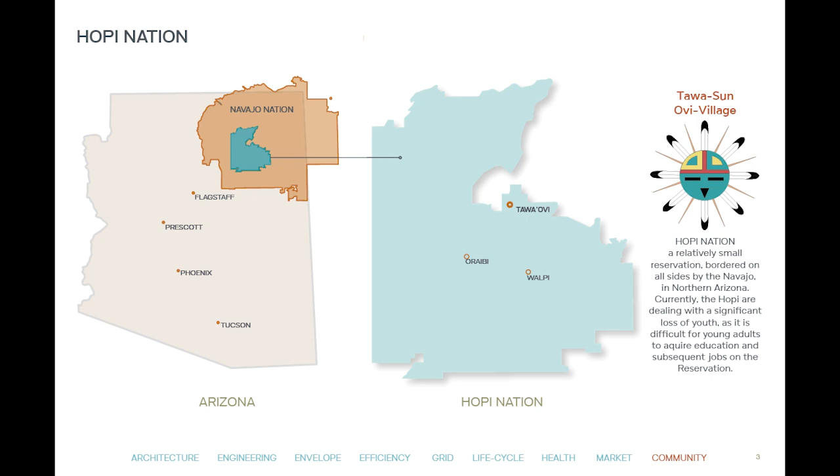Native Peoples Design Coalition at the University of Arizona facilitated a partnership between our team and the Hopi Tribal Council. The council provided a flexible master plan for a new village, Tawaovi, which roughly translates to Sun Village. The hope for the future village is that it will celebrate Hopi culture in a modern way and create opportunities for the Hopi people to flourish.

Hopi Nation uses a clan-based land system where land is passed from generation to generation within each clan. This new village will be built away from land currently owned by other clans, with no political or sacred implications.

The site currently has limited access to necessities such as grocery stores, public transportation, and healthcare options. The main grocery store, Bashas', is 1 hour away by car, while public transportation and healthcare options are at least a 5-hour walk. The nation as a whole is car dependent, making commercial spaces within walking distance a priority.

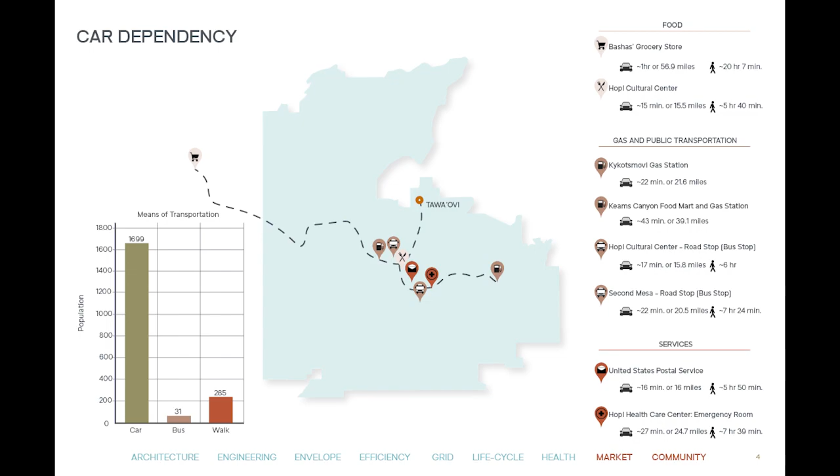When we started this project in January, we traveled to the Hopi Nation to speak with members of the tribe and get an understanding of their culture and their desires for the project. Key cultural practices and values they wished for us to prioritize included an emphasis on food and the communal nature of cooking, agricultural traditions such as dry farming, water conservation, stewardship of the land, and unity.

These cultural values became the backbone of our design responses. Communal spaces, large open kitchens, terrace roofs, increased solar production, radiant flooring, and rainwater collection were all incorporated to promote sustainable and healthy living for generations to come.

The goal of this development is to bring more educational spaces, housing, and employment opportunities to encourage Hopi youth to return to the reservation if they've left, or stay within the community.

Of the registered tribal members, 70% of them have a family, and about 50% of Hopi people have had experience with higher education. Therefore, it's important to provide housing and commercial amenities that accommodate their educational, mental, and emotional needs.

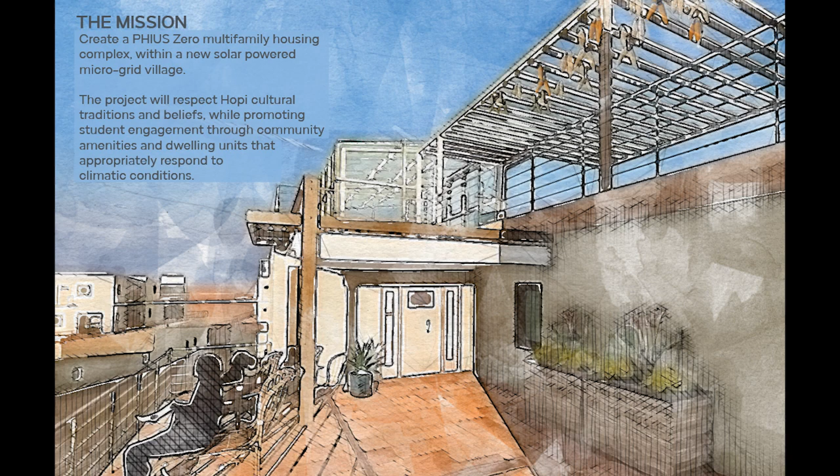Our mission is to create a PHIUS Zero multifamily housing complex within a new solar power microgrid village. The project will respect Hopi cultural traditions and beliefs by promoting student engagement through community amenities and dwelling units that appropriately respond to the climate.

The project goals address a culture of sustainability by using rainwater collection, a graywater system, and the use of prefab CLT. Exterior terrace spaces create room for traditional activities and provide a sense of visual connection to the land.

Using native vegetation for the landscape, as well as replanting those on site, minimizes invasive flora and respects the land itself. Sihi Plaza is communally connected while also providing ample private space, assisting in healthy communal growth.

Due to the minimal access to utilities on site, all three teams from the U of A have coordinated the development of a microgrid to assist in creating energy independence for the Hopi tribe.

Sihi Plaza houses students for an adjacent technical education campus. The plaza provides commercial amenities that are essential in the master plan of the Tawaovi community.

Because we're in ASHRAE Climate Zone 5B, an emphasis is placed on access to sunlight. Therefore, Sihi Plaza's form maximizes southern solar exposure.

To sustain life, there must be sun and water. So a combination of gravel runoff collection skirts at the base of each building, drainage concrete pavers, and native plant bioswales collect, distribute, and use water.

The Tawaovi Development Guidelines have requested trash compactors, native plant spaces, and fire access roads.

We have honored these requests and continue to follow their guidelines in our construction.

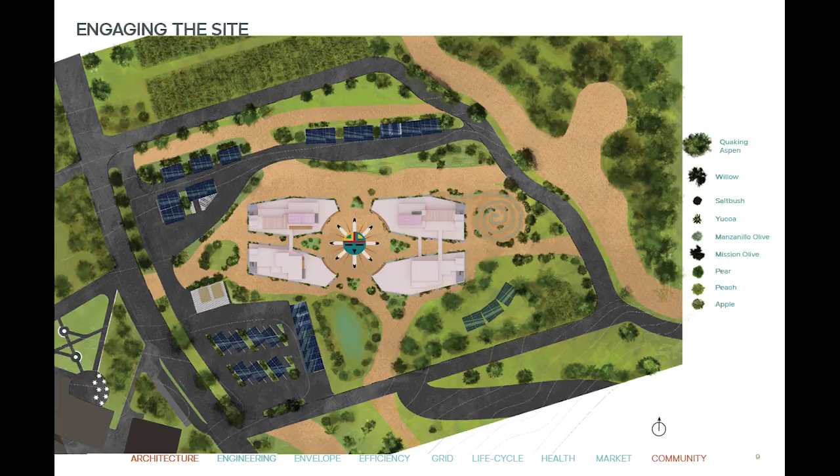Solar power is produced with photovoltaic parking shades, rooftop panels, and ramadas on the north and southeast areas of the site. Hopi architecture traditionally incorporates plazas for cultural celebrations. The central pavers depict Tawa, the sun god, grounding the plaza and making it an ideal space for ceremonies.

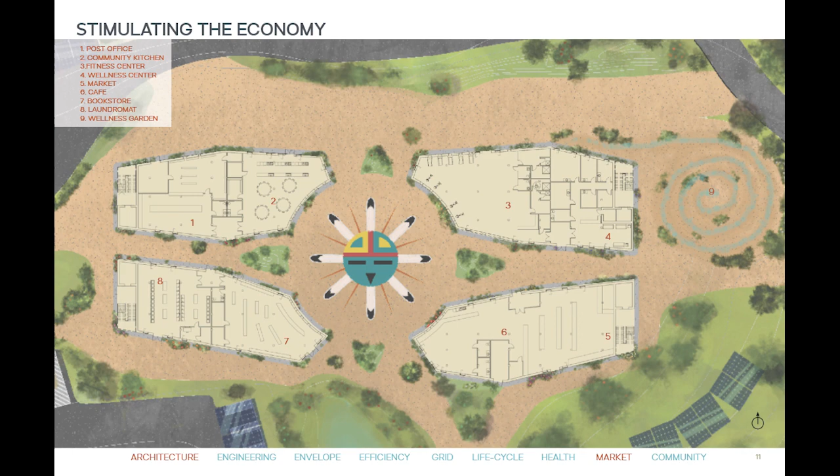To assist the Hopi in stimulating the economy, creating new jobs, and reducing car dependency, the first floor is programmed with a variety of commercial and community services. A post office and laundromat provide needed basic services. The combined market and cafe address the food desert condition on site, while also providing a space for students and the surrounding community to enjoy meals together. These first floor commercial spaces are accessible not only to residents of Sihi Plaza, but to all Hopi.

The community kitchen provides a space for cooking classes, celebrations, and social events. Some elders expressed concern for maintaining health in the community, so a fitness center was incorporated for all Hopi on the reservation to maintain their physical well-being. Indoor treadmills as well as an outdoor running path provide two ways for Hopi people to express their love of running.

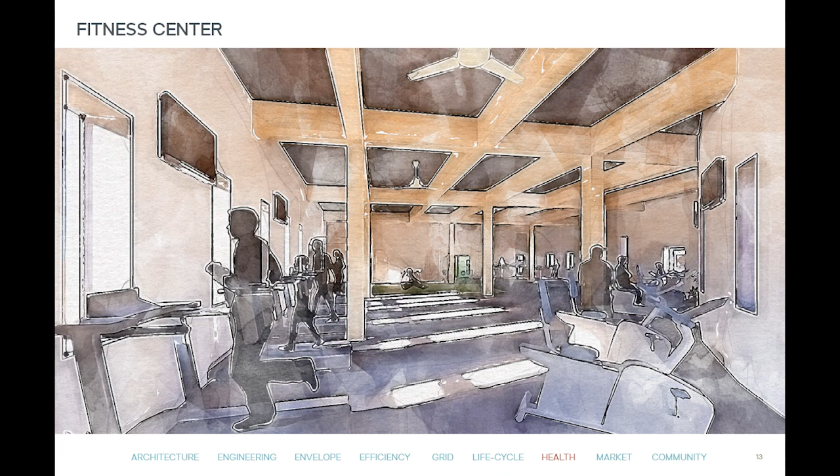The bookstore works to amplify the voices of Hopi authors by selling books from writers in and around the Hopi community. The second and third floors have 12 dwelling units, which can house up to 27 residents.

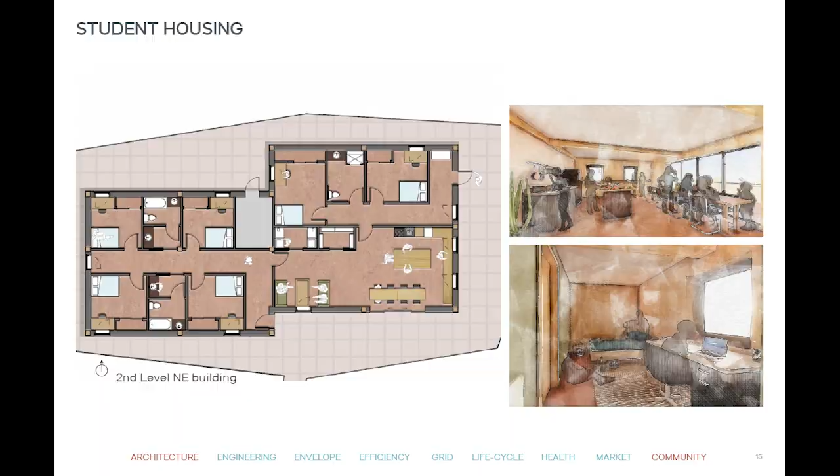These units range from 1 to 4 bedrooms, and 75% of them are ADA accessible. Residents can access these spaces using an elevator or staircase located at each end of the building. The units are connected by communal living spaces featuring large open-plan kitchens and in-unit laundry. These communal spaces allow students to engage in a more public area while maintaining privacy with their own bedrooms and bathrooms.

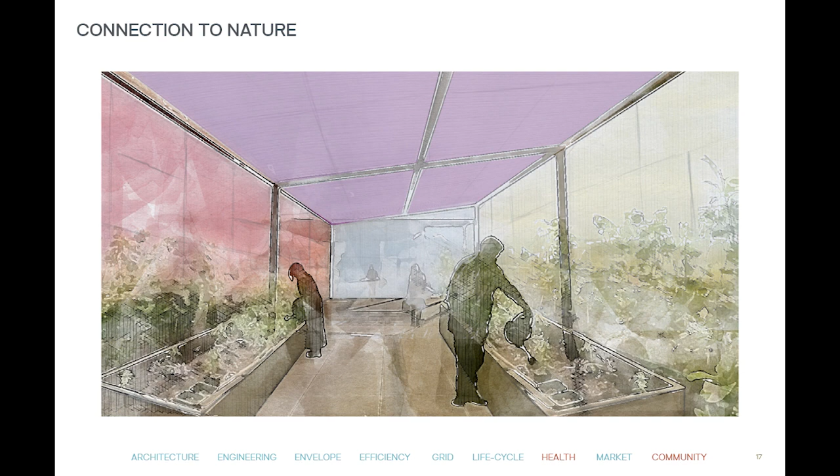All residential units have access to outdoor terraces to encourage students to engage with nature and each other. The fourth floor spaces of the northern buildings include two greenhouses and wooden ramadas for drying agricultural goods. The colors utilized on each face of the greenhouse are meant to respect Hopi cultural traditions, where each cardinal direction is associated with a color.

All of the materials incorporated in the project were selected with cost, longevity, and environmental impact in mind. The glulam throughout the project is locally sourced. The lime-based paint and plaster, sourced from California, have no VOCs, are hypoallergenic, mold-resistant, and carbon sequestering. The butcher block countertops used in the kitchens are made from salvaged wood, and the bathroom countertops are paper stone, crafted from recycled paper and petroleum-free resin.

The floors are finished with marmoleum, a 97% natural material with a minimal carbon footprint. The majority of these materials are also from relatively local companies throughout the western United States in order to reduce the embodied carbon footprint. The structure of the building is composed of glulam southern pine columns and beams.

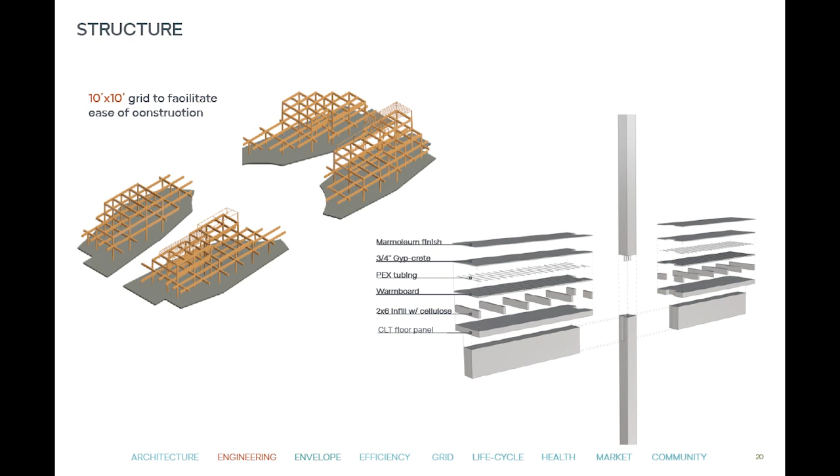The floors are structured with cross-laminated timber panels with a radiant flooring system, finished with marmoleum, a sustainable alternative to vinyl. The wall is a well-insulated prefabricated panel from Timber Age Systems, which acts as a continuous curtain wall connecting to the columns in order to prevent thermal bridging.

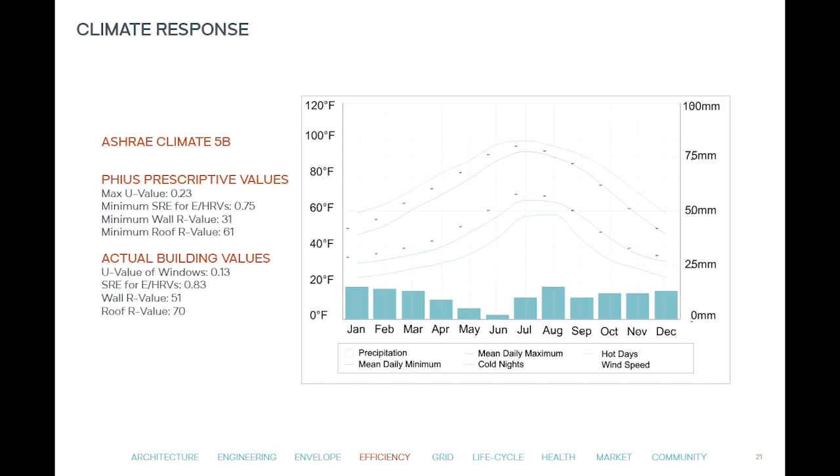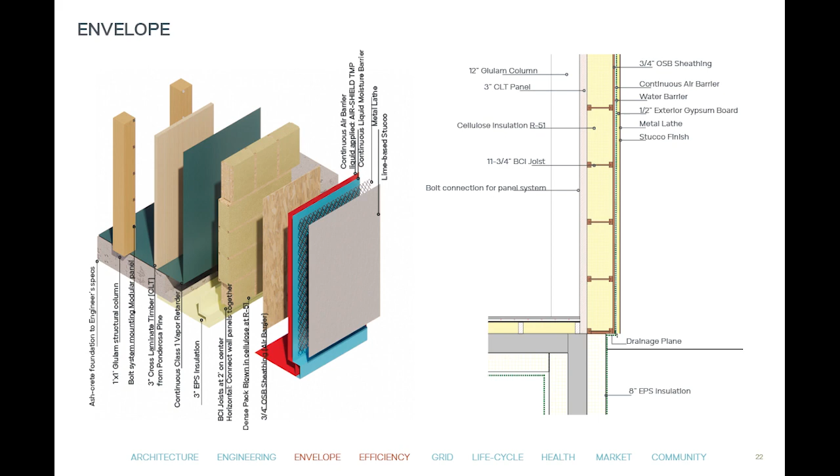Dawel Ovi is located in ASHRAE Climate Zone 5B. PHIUS prescriptive values were utilized as a baseline to create an efficient envelope. This efficient envelope, developed with Timber Age Systems prefabricated panels, was chosen for a few main reasons: the modular system helps reduce construction cost, time, and carbon impact, and Timber Age has offered to teach tribal members how to fabricate and assemble the panels on site. The CLT in the panels is beetle-kill ponderosa pine that would otherwise go to waste or contribute to wildfire risk.

Alpen Windows is a Colorado-based company with experience in furnishing windows for passive house design. The proximity to site and the quality of their windows were justification for choosing this company.

The Hopi expressed a concern with dust infiltration, so tilt-turn windows were selected in order to allow occupant ventilation control while inhibiting dust from lowering indoor air quality.

The south-facing windows have a solar heat gain coefficient of 0.5 in order to maximize winter solar gain. The west-facing windows have a solar heat gain coefficient of 0.3 in order to minimize evening sun heat.

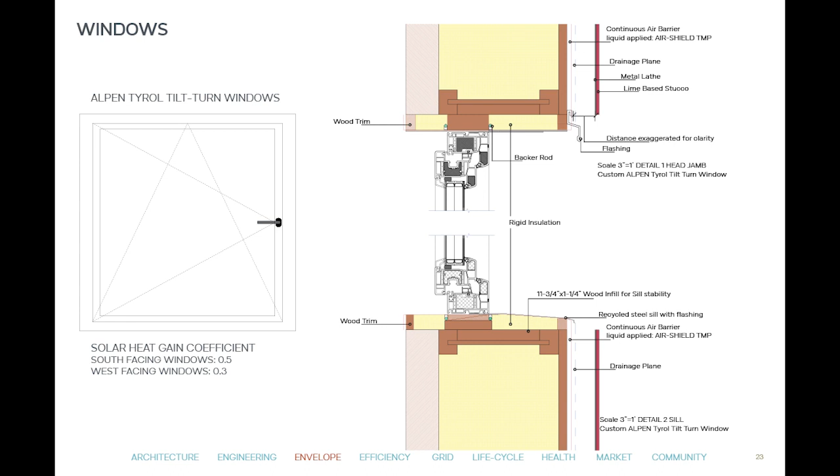Radiant flooring is well suited for this climate as there are many days throughout the year which are cold and dry. The heat pump will heat up the water and feed into a buffer tank where the water is held at a consistent temperature in order to assist with peak load hours.

The manifold is used in order to control where the water will go throughout the building, allowing different zones and rooms to control their temperatures.

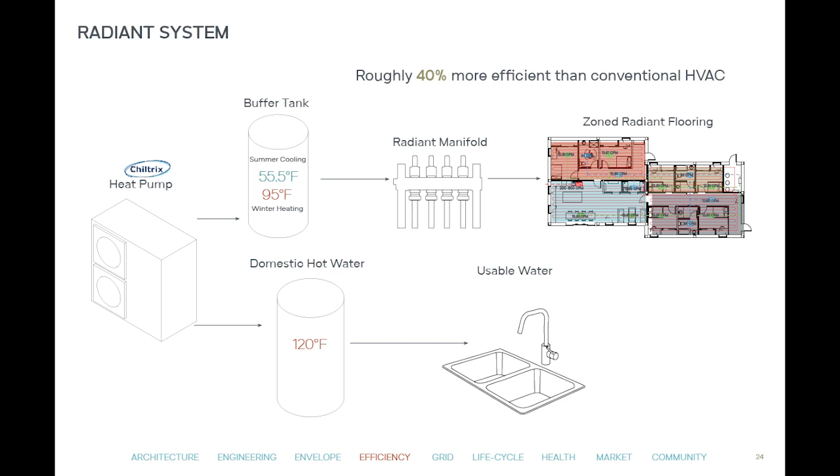The ventilation system utilizes Zehnder ERVs to ensure proper airflow in the building. The building meets PHIUS standards in regards to air changes per hour for the different types of spaces.

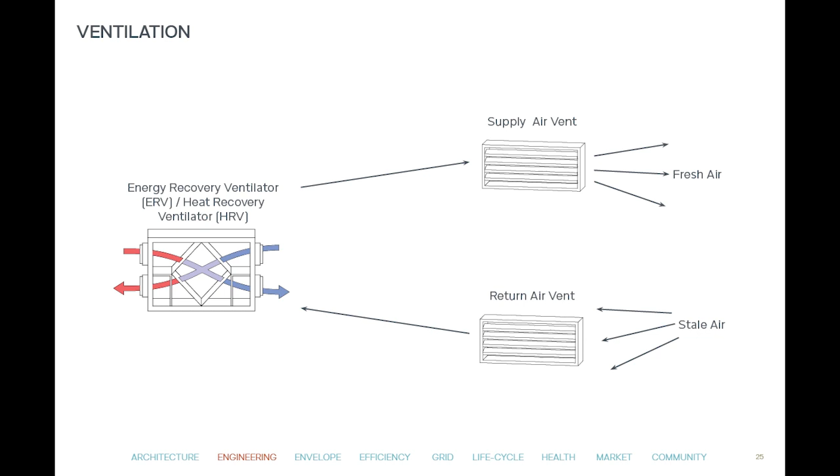Hopi people practice water conservation in a variety of ways, including dry farming, where the irrigation of crops relies on rain, and collecting gray water in order to water garden plants.

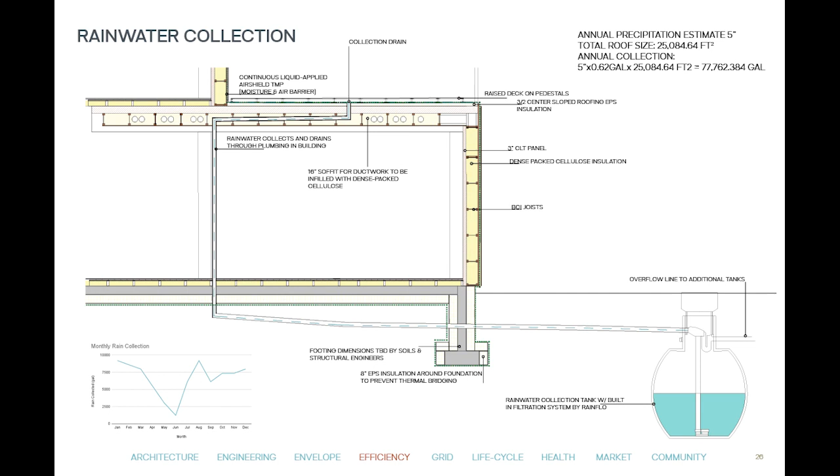Sihi Plaza incorporates both a gray water system to irrigate plants and a filtered rainwater catchment system that provides potable water. These choices help to greatly reduce the project's water footprint and honor cultural values.

The budget is currently $16.7 million, which is approximately $400 per square foot. Given the remote location of the site, labor and transportation costs were difficult to predict. However, this current budget was provided to give the Hopi people a clearer goal for funding.

We do believe that fabrication of the CLT panels on site by Hopi tribal members will stimulate the economy while helping to reduce the overall cost for this project and future projects in Dawaovi.

Sihi Plaza runs from an islanded DC microgrid, but it's not alone. Many of the Dawaovi community microgrids are connected through a commercially available system called Block Energy.

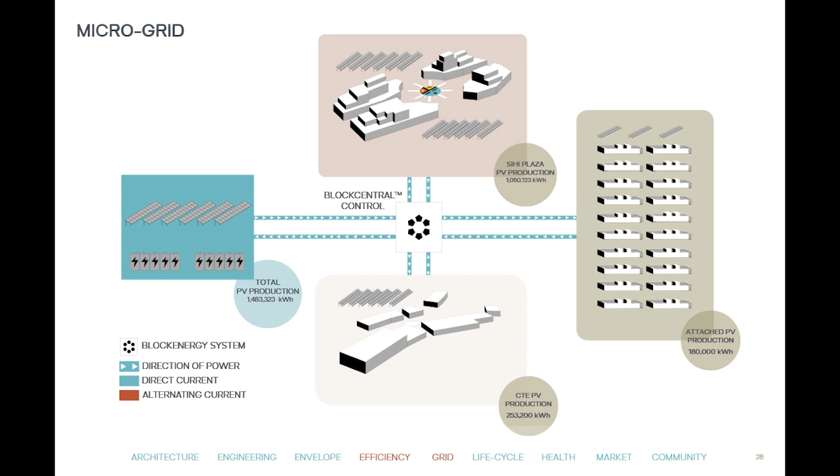Power from the solar grid and individual microgrids are shared and optimized by a Block central control system. This redistributes in response to equitable need in the Dawaovi community. For example, an outage will direct and focus critical load systems to power perishable food storage, lighting, and other essential utilities. Block homes contain a block box, sensors, battery storage, and built-in DC to AC inverters.

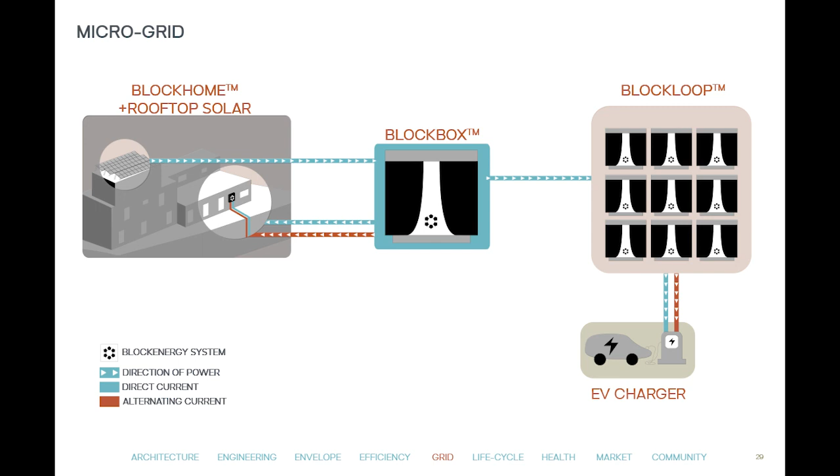Rooftop solar panels first produce DC electricity, which is then transferred to block boxes, which is shared in a block loop, or our microgrid. Then, power from the block loop can be distributed to electric vehicle chargers, as well as charge additional block home batteries connected to the system.

We have a projected energy use index of -88 and a home energy rating index of -8. Sihi Plaza uses about 15% of the overall electricity it produces annually. 35% of our power is sent to other microgrids, and the remaining 50% is used to charge about 100 electric vehicles annually.

The hope for Sihi Plaza and the village of Dawaovi is to provide the Hopi with a precedent for future developments where they can exercise their sovereignty while preserving traditions.

As we continue to develop the project within the coming weeks, we will meet again with Hopi tribal members to ensure we are focusing on their main goals, including water conservation, energy sovereignty, and expanding community growth.

We will be addressing our water conservation by further developing and clarifying our rainwater collection systems, as well as our gray water system. We will continue coordinating with Block Energy with the hopes of finalizing the plans and budget for the microgrid.

And when we meet again with the Hopi people, we want to ensure that the commercial program satisfies their desire for community growth and fulfills their need for economic stability.